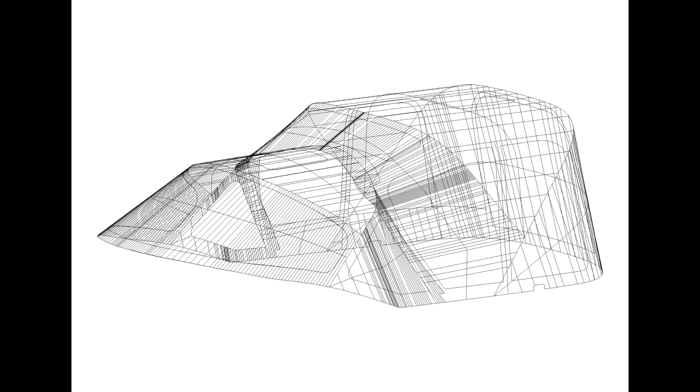The rendered shots - I've just posted one of the rendered shots of each project here, and then a photo of the completed project. It's not always possible to get exactly the same angle in the photographs as we've taken on the screenshot, just because of the elevation.

You're seeing here that there are no surprises really for the customer, and you can spend as much time rendering as you want producing the images. But what you're seeing now are some images we've taken a bit more time producing, which we've used for promotional work. These are all of projects that are actually completed, signed off, and went into production.

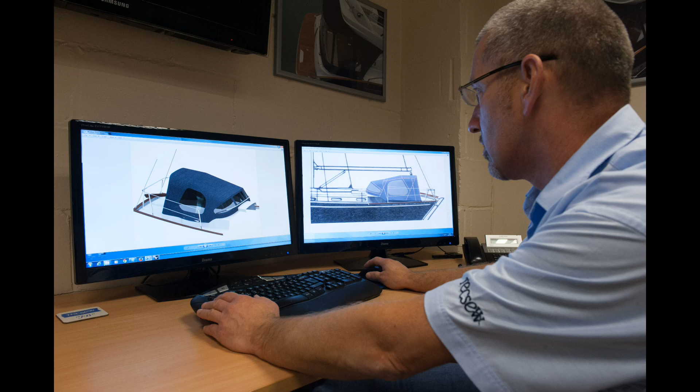Our CAD design process has been reviewed by a few magazines, including the project you're seeing now, which was done for one of the leading UK yachting magazines, Yachting Monthly. They actually awarded us the first 10 out of 10 they've ever given a reviewed project or product, so we were very happy with that.

They really were on board with the benefits of the CAD design process, and we were told that two other companies walked away from the project before we took it on, because of the difficulties in putting something pleasing to the eye on the boat.

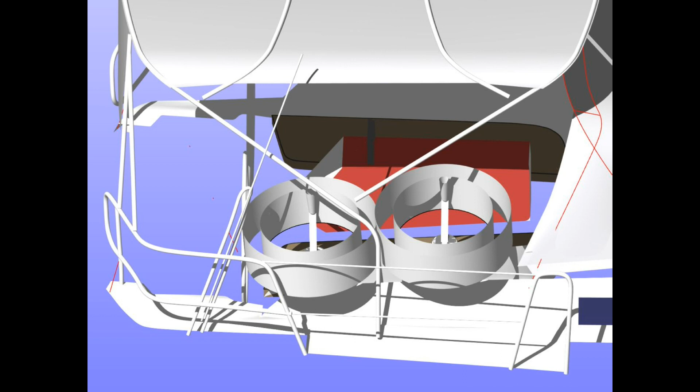You're seeing a shot here showing a Bimini. Bimini framework is sometimes difficult to work out, clearing the winches and such, but with CAD we can do that - we can check winches are cleared.

This is our CNC conveyorized cutting system. You would have seen a little of this in the preceding video. This is Paul, who works mainly on the frame bending side, but here he's operating the cutting table. So you saw the conveyor working there.

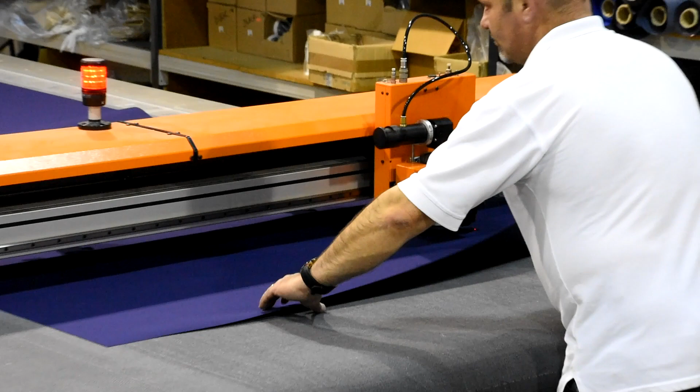What happens is the vacuum is released on the fabric, while the fabric's held down by clamps when the conveyor's moving. That drags the fabric to the correct position, and the vacuum is then applied. If the vacuum were constant all the time, the conveyor wouldn't be able to move.

So Paul's changing the pen here - different colored fabrics will require a different colored pen. We cut with this is Sunbrella Plus, with the fabric face side upwards, using Fisher Space pens which work on this fabric.

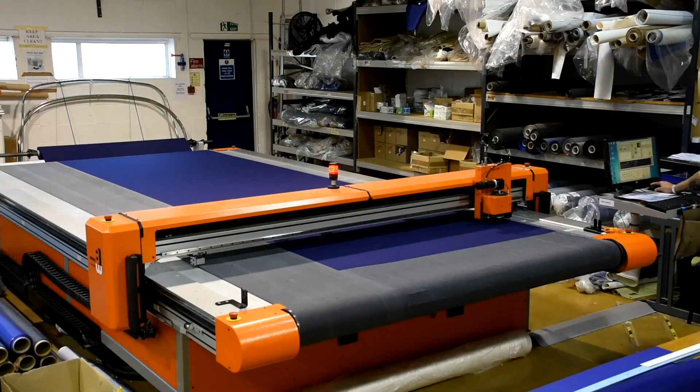You're seeing a CNC cutting file on the monitor there, and that's been sent over to the table, and the table's cutting. We can vary the speed - the table will actually cut quite quickly if we want it to, but generally there's no real need.

If it's cutting at full speed on a complicated project where all the panels are different profiles and shapes, there's no requirement for it to go super fast because of the operator time taking those panels off. However, if you're cutting many repeat products - perhaps halyard bags, identical winch covers - you can have it feeding into a bin as they come off the conveyor and not attend it.

The blade on here is vibratory - an oscillating blade. Before this we had a flatbed cutter of a different brand, and I'm guessing a few companies in the States have that sort of format.

What the vibrating blade does is require less vacuum on the fabric. There's less drag with the blade, and you get less of what we call hanging threads - basically where you don't get a clean cut, and some threads perhaps need going over with scissors just to make sure it's clear.

Because it's conveyorized, the fabric needs to be fed onto the table exactly in line with the datum. The fabric feeder uses a laser to line the fabric up with the table, so the roller will move from left to right and present the fabric exactly on the datum point of the table.

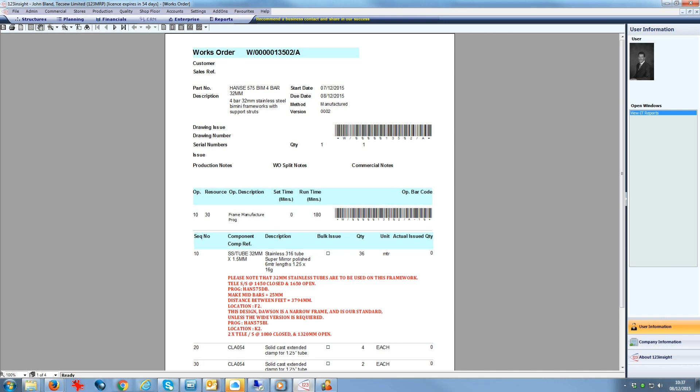This is an MRP system, standing for Manufacturing and Resource Planning, that we use within the company, and here is a work order generated for a framework to be produced. I'm now going to show a small video showing how we manufacture our frameworks.

Whilst the video is playing, I'll give a little bit of a rundown in terms of what's happening here. You'll see some text annotations on the slides, but I'll try and give an insight into what's happening.

Basically we do not bend a framework until the CAD design is signed off. That's what we're doing that is different perhaps to the competition. With all the new work, we're actually designing the CAD model, and it's only when this is signed off that we go ahead and produce the frameworks.

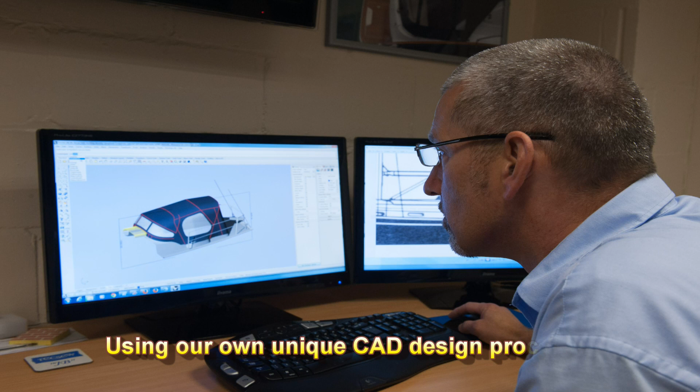Some of what you're seeing on the screen here, this project was the one featured in the magazine. We gave a comparison in terms of what was on the boat beforehand and how the new canvas would look and address many of the problems that they had on the boat. You can see on the right hand monitor there on the screenshot that we can superimpose the model onto a 2D drawing of the boat if that is available.

So the bar program is produced from that CAD model. We produce a DXF file and we bring it into a software package that we use in terms of generating a bending profile or a bending program to bend that shape, and we also store as a computer file a pattern of the bars. One, so they can be checked against it once they're bent, and two, the cut marks are on those drawings as well for the various cut points.

So maybe the front tube will be smaller than the rear tube.

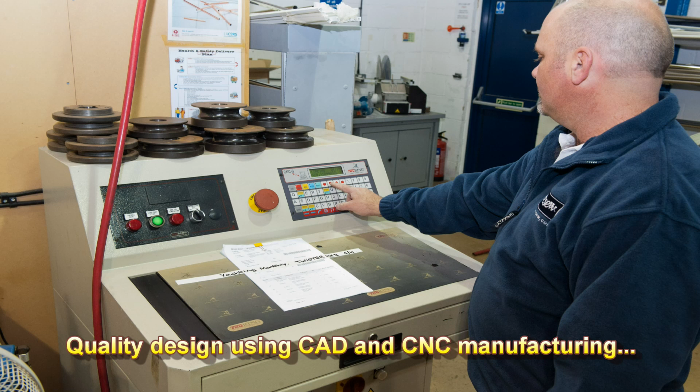The CNC program's fed through to this control system. It's not that complicated. There's a PC interface to do the programming, although it can be done manually on that keypad, but generally Paul is selecting the program on here, and once the program is selected, the bar will then be bent. There's a device there that operates off a foot pedal, but basically the tube is fed through the 3 rollers on this machine, and the top roller will move down and depress the tube, and that roller is controlled by the computer program, moving up and down all the time.

So a tighter radius will necessitate that roller depressing further into the tube. There are various size rollers that we can interchange on the machine for different size tubes, so different diameters will require different rollers. So most bars will be a combination of an identical radius in the shoulder corners, and then a different radius on the top.

But we are not restricted to any specific radius, apart from the tightest radius the machine will bend, which is around about 160 millimeters, say 6 inches, 6-7 inches, which is more than enough for our needs. So we can draw on the computer screen whatever shape we like, whatever radius we want in the corners. If we've got a 24-inch radius and we think that a 28 would look better, a 30 that would look better, we can draw it, and we can just keep changing.

And with the top profiles of the tube as well, we can match curvatures that we take from the coach roof or any other point.

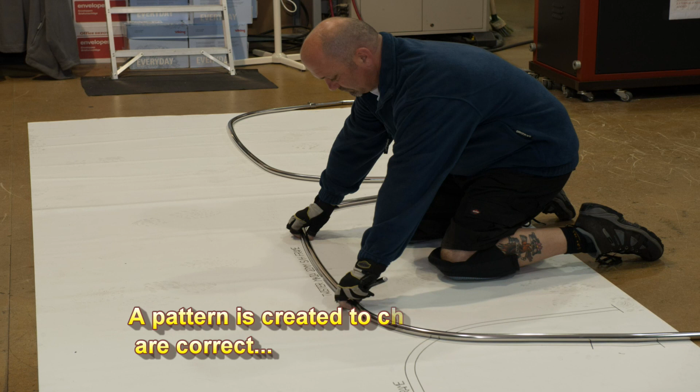This is our frame shop, so the factory that we have at the moment is split, well, a combination of two different industrial units. The framework is primarily done in this unit here.

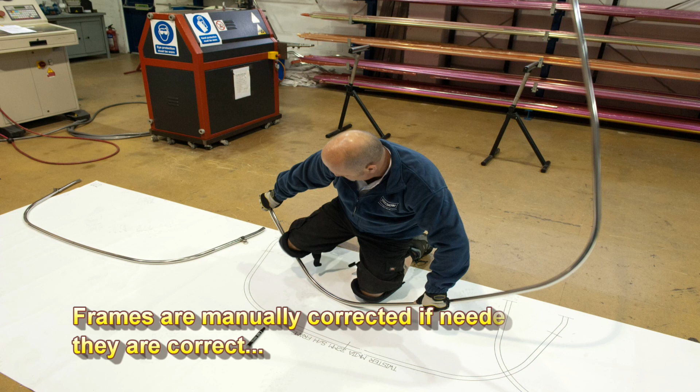So using the CNC cutting table, we would draw as a reference the correct profiles for these tubes, because we need to know where to cut the tube once it's come off the machine, and sometimes there can be a slight little bit of manual adjustment.

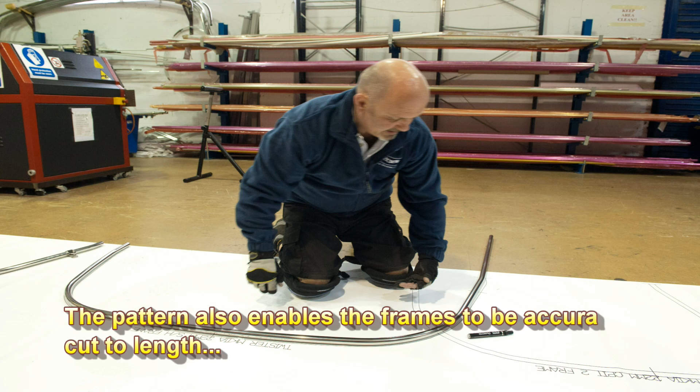What you become aware of once you start bending with machinery is that stainless is very reliant on its ambient temperature for consistent bending results. So when it's colder, it's much firmer, and it will tend to spring back a little bit once it's fed round a profile. When it's warmer, it will be much softer and easier to bend.

When the tube's cold first thing in the morning on a winter's day, we'll probably find that it's a little bit underbent and maybe need to be manually adjusted. This device, well, we imported this from the States. It's made by a company called Tri-Tool.

It basically uses a power drill and a lathe cutting tool, and it cuts the tube. One of the reasons we went over to this device was a manual cut-off saw created a lot of dirt, a lot of mess in the cutting shop. So this uses a lathe cutting tool, cuts the tube cleanly, quite quick and easy.

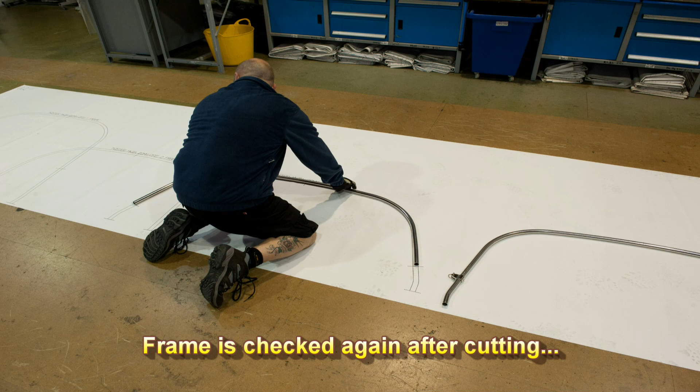The other option is obviously manual pipe cutters, but that's a quick and easy way of doing it.

We rivet all our fittings on with stainless rivets. We never rely on the grub screws that come with the fittings. Stainless is too hard for a grub screw to lock and locate unless a little divot is drilled into the tube to take the grub screw. But we will rivet, and always stainless rivets - anodized aren't strong enough for the job.

We use a pneumatic riveter, and the battery-powered version out on site. It's quick and easy, and it will store the ejected rivet post as well, giving a nice clean finish on the tube.

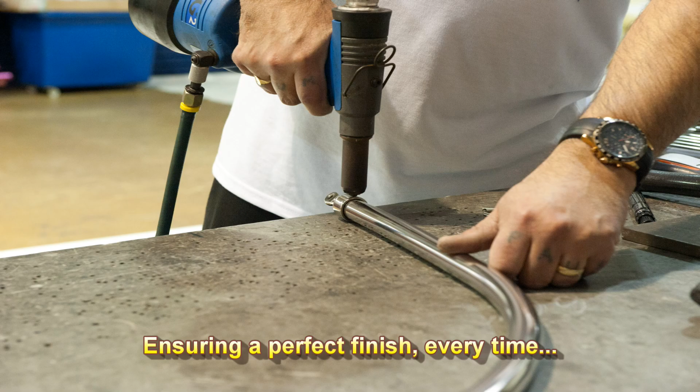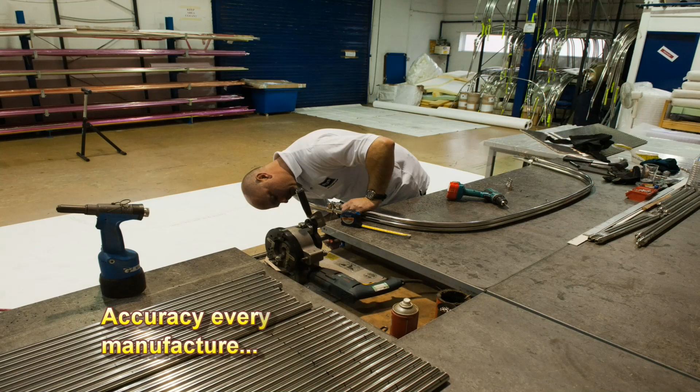So moving on, you can see the framework being put together. I'm sure we're all familiar with the fittings. We tend to not use screwed fittings unless there's no alternative, so all of our frames and deck fittings are quick release versions. Even if the fitting comes with a screw, we would probably drill out the thread and use a quick release toggle pin. The heavier size frameworks, 32mm, 1.25, we use drop nose pins to actually attach the framework.

Most of the screws that come with the fittings, we had warranty issues with because it's quite a coarse thread. There's no lock nut on the back, and quite often with a Bimini framework with a lot of movement, sometimes those screws come loose without the customer realizing.

We fit all our frameworks with these adjustable end plugs. You can wind each version in and out. On the right hand side you see the standard fitting that can be wound out about 25mm, and if you need to extend the frame more, you can use the intermediate or the longer pin. You just interchange it - screw one out, screw the other in.

These are great for recovers. So if we're doing a recover sprayhood, sometimes we change those fittings because the framework may not be exactly symmetrical. The customer may have cut a failed fitting off the tube at some point, and we do a lot of production work.

Certain boats may be slightly different as they come out of the mold. They just give a little bit of adjustment, and sometimes winding up the end plug by sort of 10-15mm can be all the difference between making sure the canvas work fits correctly.

And canvas stretches - later on it may shrink, but initially it tends to stretch. What we tend to find is after 3 or 4 months, if you go and wind these end plugs out 10-15mm, guess half an inch, three-quarters of an inch, you can get that as-new fit back into the canvas work.

In the rear of the shop, you can see we have a racking system for storing frameworks for production boats, but now so much of it is customized. Going back in the past, we'd probably run with up to 15-20 models of certain spray hoods on the shelf in the quieter months, ready for main season, which helped us deal with the ebbs and flows of the trade. But we still have production models, though we find we end up doing a lot more customization now.

This is a little easier to do with a CAD system, because once we've digitized the boat and built up the data we need, it's not that much more difficult to go on and design a higher spray hood or something that comes back a little bit further. So it gives us flexibility.

Right, we're going to move on in the video. I'm looking here now - you can see how we store the frames. We use a racking system basically without any boarding on it, and that works to keep them off the floor and stowed pretty well out the way.

We fit a lot of grab bars. With some contracts they're put on as standard. They're normally welded, although we've developed a way of putting side grab handles on now that's shown on our website with standard fittings. But this is how we would normally attach a welded grab bar.

So the pockets are all zipped, so that the canvas can be taken off fairly easily. And the grab bar obviously adds inherent strength into the framework as well. Again, this is a project that was featured in the magazine that gave us a 10 out of 10.

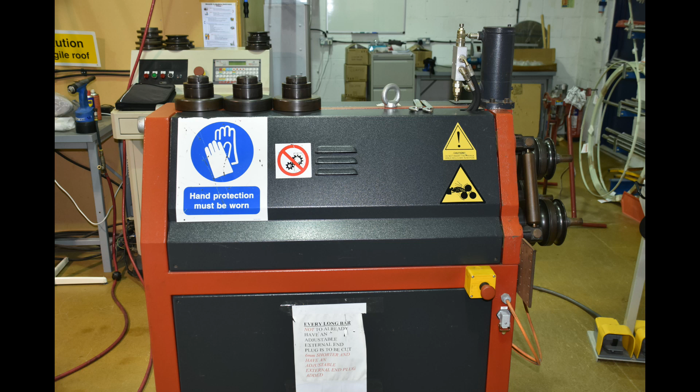This is the bending machine again in a little bit more detail. So this is a CNC control panel. The correct name for this machine is a CNC ring roller, and there are manual versions which are cheaper.

With the manual version, that center wheel would be wound down to the correct coordinates manually, and you'd keep a record of the coordinates used for different radiuses. But with a CNC version, the computer program will drive that wheel. So basically, if you draw it, you can bend it.

It's the center wheel that's moving up and down, and the two outer wheels that drive the tube through. This is a cutting device in a bit more detail, manufactured by Tri-Tool, an American company. It's a clean method of severing the tube.

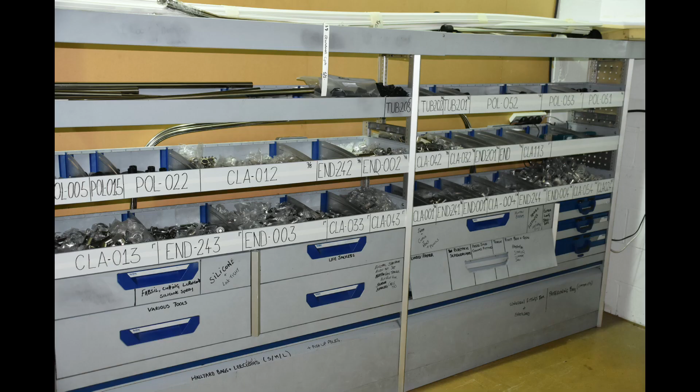I'm sure most of you are aware of pneumatic and battery powered riveters. We use a battery powered version of that out on site, and this is just showing how we store frame fittings. Part numbers are shown there, and this is a frame shop.

We also use this sometimes to lay out large templates, and we would use a ProLiner perhaps to register that template if it was something that was templated.

Showing part of our zip storage. We buy direct from YKK so that we can get the colors that we want. We stock zips in many colors, so there would be beige, burgundy, red, green, a mid blue, probably a few more as well, but by buying direct we get the colors that we want.

You're seeing some of the tools that we use for inserting and cutting the holes for lift the dot fasteners, turn buttons and eyelets. Grommets are put in on an automatic machine which has a feeder, and just some shots around the facility here.

Hopefully we're out of here in September and into our new building, which will give us more floor space and room to grow. I'm going to move on now onto a 3D CAD project which we've worked on recently, and I've taken some screen recordings of the project.

So let's see how we get on.

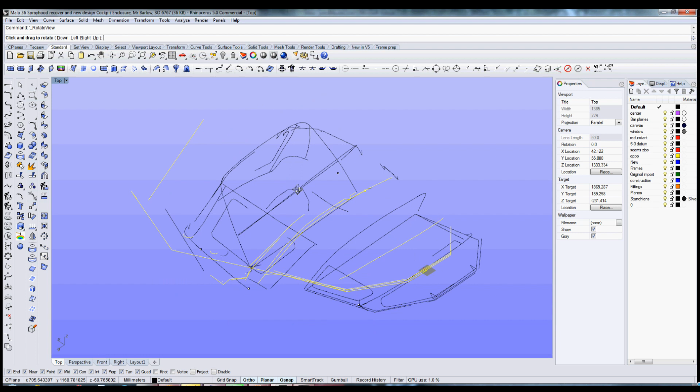We prefer working on projects where there's no pre-existing canvas and the whole design is down to us, but this project had a pre-existing spray hood and cockpit enclosure, and the owners were looking to improve the cockpit enclosure. Mainly they wanted more coverage with the roof section, so that the rear bar of the cockpit enclosure could come further aft, yet still have the framework work on a track and fold effectively against the arch. Now, you cannot capture all the data with a ProLiner in one location, so the ProLiner has to be moved.

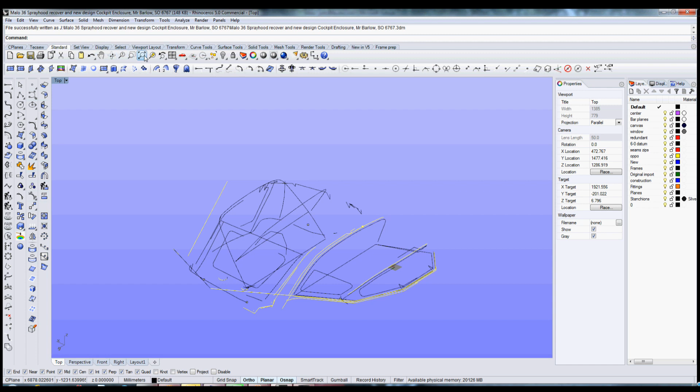Perhaps 2 or 3 times, maybe on a large project 8 or 9 times. But what we do is take reference points at each location of the ProLiner. So before it's moved, we capture 4 or 5 reference points, and then when the ProLiner is moved, we'll try and capture those reference points again, and like a jigsaw puzzle, we'll use those reference points to snap the data together.

So the black here is the first file with the ProLiner in one location. The yellow is once the ProLiner has been moved, and what we're primarily doing here is getting points that are on the arch that couldn't be obtained with the ProLiner in the first position.

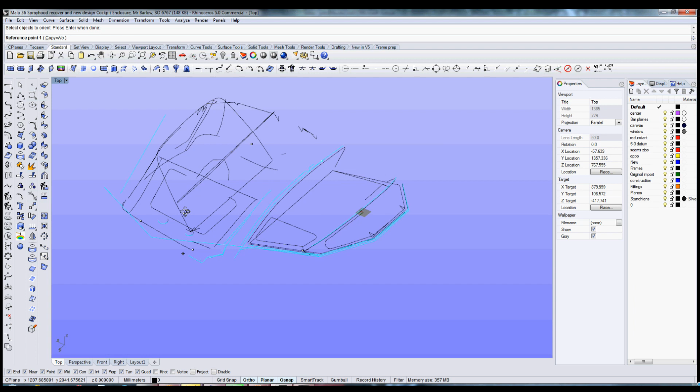You can see the bar profile of the spray hood there. The yellow doesn't correspond with the black. The black is registered with a ProLiner inside the canvas, so it's the inside of the bar. The yellow is with the ProLiner moved to on the foredeck outside of the canvas, so we've got the outside of the bar.

So we spend quite a bit of time trying to fine tune and get the best match lineup that we can, because there is a tolerance on the ProLiner, and points can be out by 1 or 2 mil. You can also find that if it's windy, that will affect the accuracy as well, because it can put a little bit of a bow in the wire to the probe.

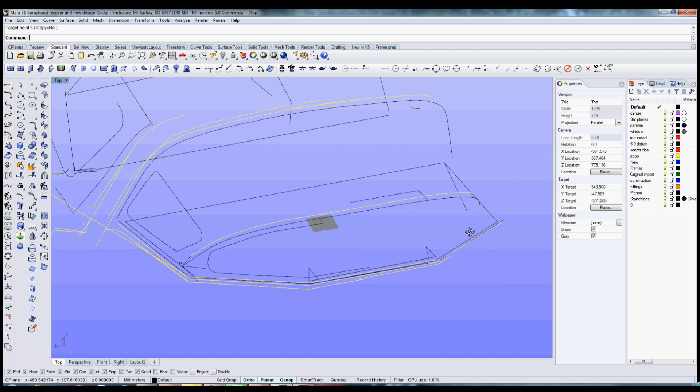So we would always take more than 3 reference points. We don't use the datum points that come with the ProLiner, because that's a set of 3 points. We would try and take at least 4 or 5, because you can guarantee once you've moved the ProLiner, one of those 3 points you cannot reach. So if you've got 4 or 5, you have a good chance of getting the 3 that you need to match one part on top of the other.

So here you are, we're just taking time, getting the best match that we can. Within Rhino, sometimes the lines can look quite far out, but when you actually go in and measure the discrepancies, it tends to make it look worse than it possibly is. So what can look like quite a large discrepancy, if you go in and measure it, is probably 1/8 of an inch, or 2 or 3 mil at most.

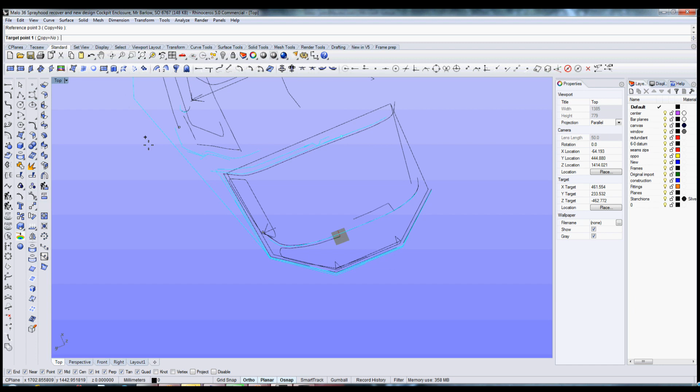So here you go, I've got a custom desktop as well. If you're using Rhino, which is our CAD package of choice, you can customize your desktop. You can bring the tools onto your desktop that you use frequently, and once you get to learn your processes of actually

lining up the drawing and producing what you want, you'll know which tools you need. Rhino is quite a cheap package compared to SolidWorks. The reason we ended up using Rhino is when we first started using CAD, we looked at SolidWorks, and at that time SolidWorks wouldn't perform some of the functions that we needed. One that comes to mind is lofting to a point. So if you imagine a push-up pole on a flybridge tonneau cover, you couldn't produce those surfaces.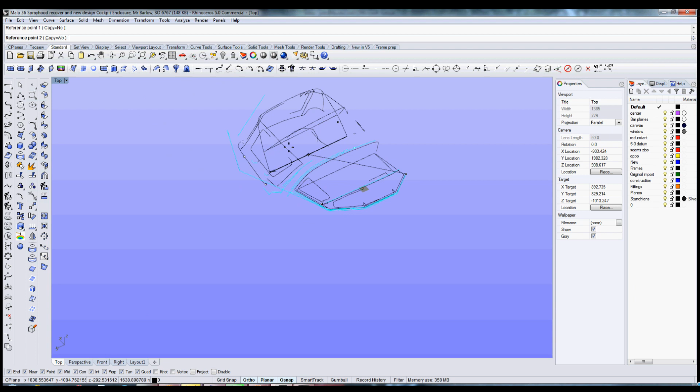Those points have been addressed in SolidWorks now, but by the time they came back to us, we'd been using Rhino successfully for a couple of years, and to me, Rhino is the package of choice. It's easy to learn, it's cost effective, very easy to customize as well, and we wouldn't look at another package. To me, it does everything that we want.

We don't use mPanel or any of the other plugins. We have a few scripts that we've written ourselves. And there's lots of add-ins that you can purchase, some of them free for Rhino, that will give you added functionality.

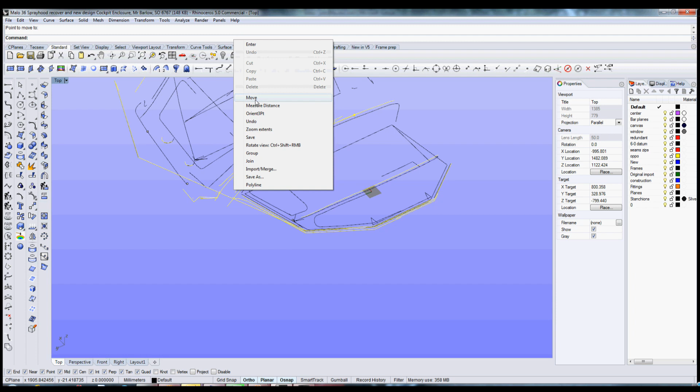So the main thing with Rhino is learning the relevant tools to get what you need out of the package. There are so many tools within the package that quite often, if I give advice to anybody that's trying to do something within the package, the tool is there. They're not aware of it. They're not aware of what can be done. And I have to wonder, even with ourselves, there's probably better ways of doing some of the bits and pieces that we do.

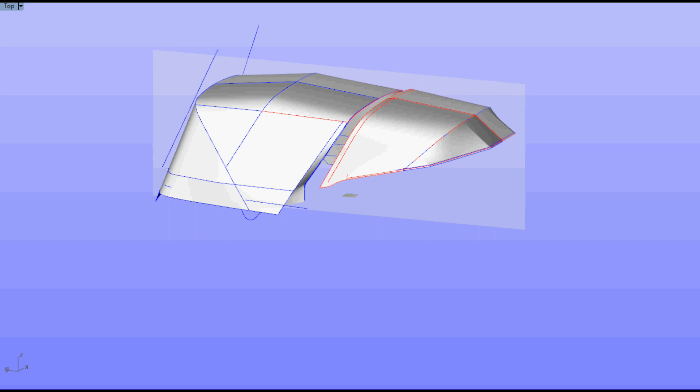But like I say, I would recommend Rhino, and the ProLiner is the device that we use. One thing with the ProLiner, I've been contacted by many companies asking for advice on how we do what we do, and there's a big learning curve, and to get on and do what we're doing with Rhino and CAD takes years and years of experience.

But there's an easier way in. I would perhaps start using CAD where you could justify the cost of a ProLiner for basically copying in 2D canvas patterns. So if you've got access to a CAD cutting system, you could register those patterns that you have stored away. They're much easier to find if they're on a computer, with a searchable database.

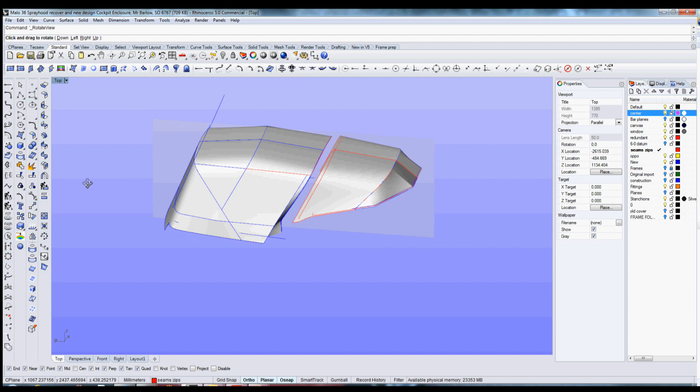So perhaps start with learning 2D skills. We started designing frameworks. There's nothing worse than having to cut frameworks and tweak frameworks on a boat. With CAD, if we want a framework to end up at a specific height in a specific location, you can draw that in CAD and work out the measurements that you want. And you can design the framework to work around winches and things.

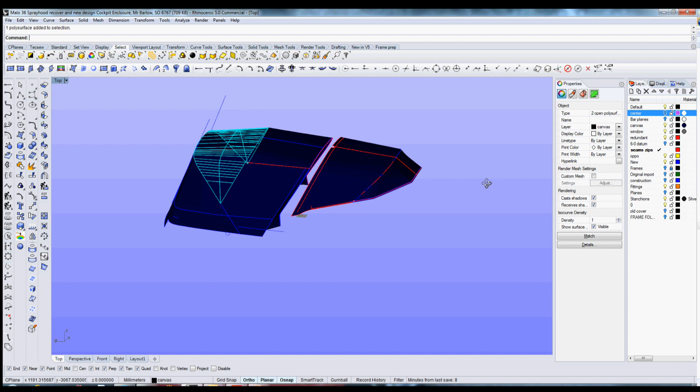So I wouldn't look to go into the full functionality of designing 3D canvas at first. I'd look to store patterns, basic products like dodgers, sail covers, design of frameworks, and then move on up as your skills build. What you're seeing here, you've probably seen this running in the background.

The package is... you can see the spray hood is basically very similar to what was there before. We haven't really changed anything, but we'll try to improve the fit and get a better window line. But with the cockpit enclosure, we've brought the back edge much more towards the vertical now, so we're giving the client more coverage, more volume in the cockpit enclosure, which means he can get behind the wheel and pedestal easier.

And if the back's rolled up and he's standing underneath it using it as a bimini, the roof is further extended over his head. And the backstays are registered there because the backstays are the limiter in terms of how far back we can bring the canvas.

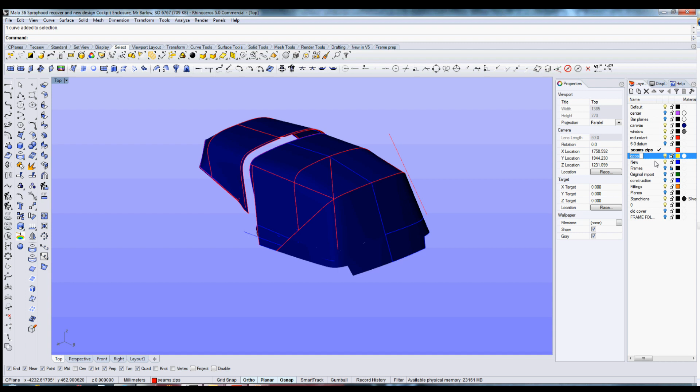This particular boat, the port and starboard are different. The winches are different - we see this on a lot of models because winches don't always operate the same way around. Sometimes the winches on the port side will be in a different location to the starboard side, and the winches deflect into the canvas here. Also the arch isn't symmetrical, so it almost means designing the canvas work twice - that's the same as if you're templating or measuring, because if it is different, then you're doing both sides.

But generally most boats would be symmetrical, and we're aware of the things to look out for. Arches tend not to be symmetrical. Winches can quite often be different on both sides.

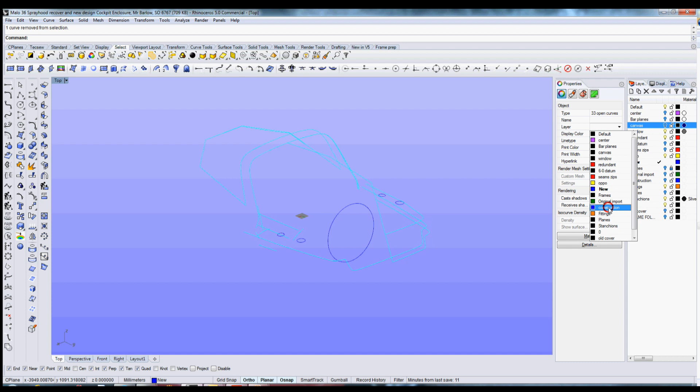So you can put your various elements on different layers. You can turn layers on and off, which helps if you're working on particular aspects. I definitely recommend getting used to using layers within Rhino, and you can change the color attributes of different layers - so if you select yellow for that layer, anything you put on that layer will be yellow, and you can change parts you've already drawn from one layer to another.

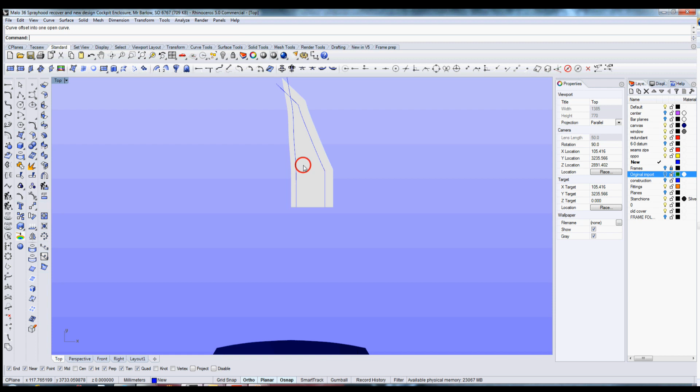What you're seeing here, I'm just selecting bits and pieces and working on the profiles. You can unroll the panels once you've drawn the model, and it's easier to draw windows with a panel on the flat, so unrolled. One of the reasons for doing that is you can put radiuses, fillet curves, offsets - all tend to work easier with the panel unrolled.

Once you've drawn what you want, you can roll that geometry back up onto the panel, and you'll see that in a minute. So I'm going to put a radius in the corner there, and I've selected that radius to be tangent to the two lines I've drawn.

The old window line is on there as well, just as a reference, so I've turned that on and off, you can see there. But as I say, we're not changing too much on this, but with CAD, things like offsets are very quick and easy - it's a click of a button, and there you are.

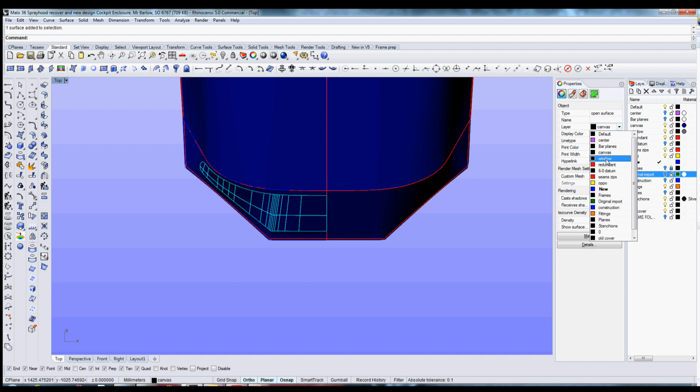I've just rolled that back up onto the panel. So the curve that I've drawn, which is a window line, I've rolled back up onto the surface, and then I've split the surface with that line, and the part that's a window has been split from the canvas, so I can give that a different attribute.

All I've done is put that on a layer that I have marked as window, and the characteristics of the window layer are that it's transparent with a little bit of reflectivity, and the color matches window material. We create a template for this within Rhino, so when I open up a project, those layers are already there - we have a canvas layer, a seam layer, a frames layer, and a window layer.

As you'll see here, when I split this panel, all I need to do is move it onto the window layer, and once I've put it onto the window layer, it will automatically have the attributes of window material.

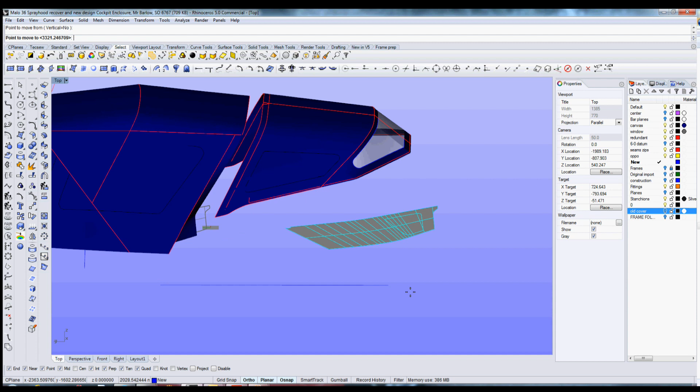Sometimes things don't work, but with experience you tend to find out why. So if you can't split a panel by a line you've drawn, what you probably need to do is just pull that line back onto the surface, and then it will split.

What you're seeing here is the window on the old canvas that's there already - I'm using that as a reference. I would have taken some notes if I wanted to change it, and we take lots of photographs when we're on the boat as well. If you're using the ProLiner, you cannot take enough photographs, and it helps to work with twin monitors so you can look at a photograph of the boat whilst doing the design work.

So I'd be aware and take notes of anything I wanted to change, but the client was quite happy with what was on here beforehand. So I'm filleting the corners of the window here.

You'll see what I'm drawing is a little bit different to what was there before, mainly because there was a slight mismatch in terms of the bottom profile of that side window compared to the spray hood window.

I can go in and take measurements, and I can adjust afterwards if I think it perhaps doesn't look quite right. It's quite quick and easy to adjust.

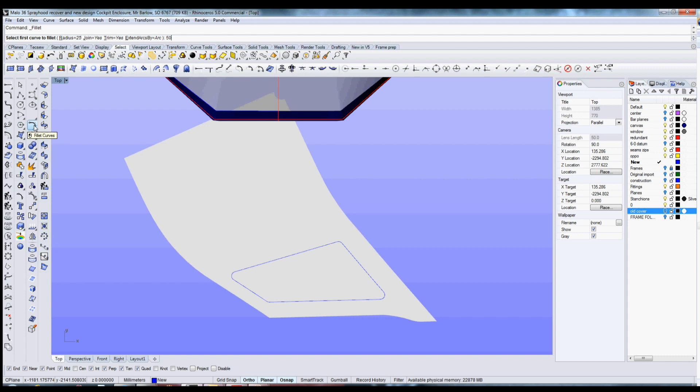So what I'm doing here is I'm actually going to raise it up a touch more, and fillet those corners there. You'll tend to have your standard radiuses that you'll use for a lot of projects. As you can see, this doesn't take long, and it's quick and easy to adjust - if you were marking this out on canvas with chalk or pencil, it takes, I would say, more time.

So now what I'm doing is I've rolled that profile that I've drawn back up onto the actual canvas, and what I'll be doing here is splitting that canvas by the line I've drawn. I select the line, split the canvas, put that split section onto the window layer, and it automatically generates the appearance of a window. And now I've deleted the old window line.

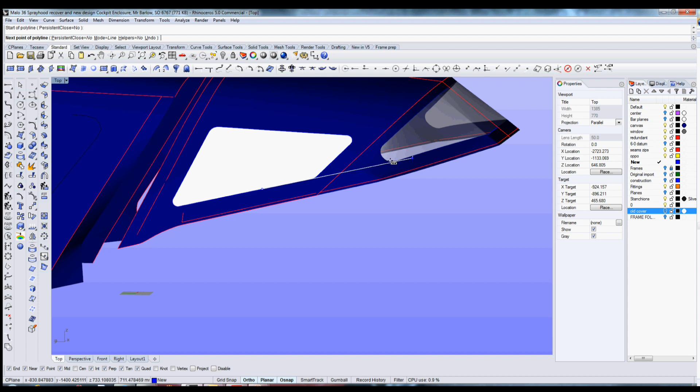As you can see, I'm just looking there - the side window runs into the profile of the front window in terms of the offset up from the bottom. It looks correct. It will be a different measurement up to what the front window is, but optically it looks correct. Now normally, most boats being symmetrical, you would just mirror this and it will work on the other side. But the other side of the boat is different.

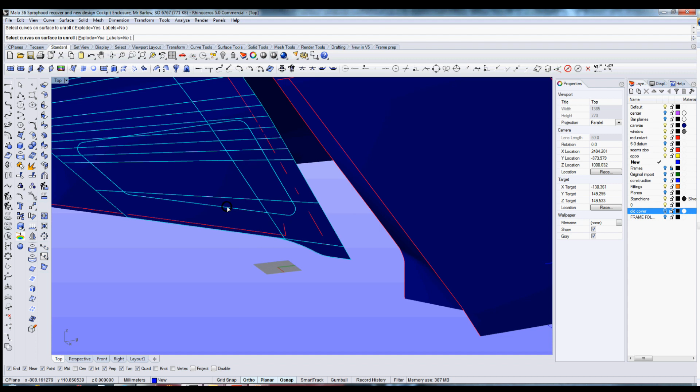So what I've done, I've mirrored that line, which wouldn't have been on the surface. Now I've used a command called pull to pull that onto the surface - basically it's just projecting it onto the surface. Now I flatten that surface with that line. But what I'm going to do is I'm going to draw that now properly.

Although I've just pulled that onto that surface, the offsets may be different to the other side. So say the window was 4 inches up on this edge, it may not be, and you'll see that as I start to draw. So I'm taking some measurements just to have a look, and so there you can see straight away where it's different port to starboard, and that's because the arch is different. So I'm typing in the same offset measurements that I used on the other side.

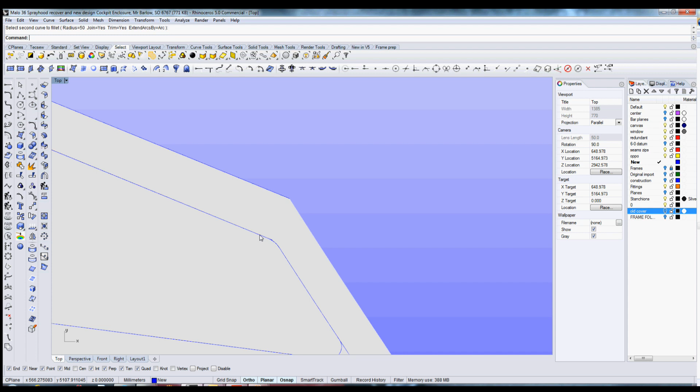It's always a difficult one when a boat is different port and starboard. I always make the owner aware. I think we've all had from time to time where an owner will actually take out a tape measure and say, well, this is a little bit different port to starboard. So what we do is we try and get something that looks right, where the eye wouldn't naturally pick up that it's different. But obviously if somebody was taking a tape measure, they could measure the fact that this window is not the same length on the top edge port to starboard.

But the owner will be sent what we call CAD renders, photographs of the actual completed model, and we take photographs from all angles, and you'll be seeing some of those later. And we have the owner sign the project off. So I would make them aware that it's different port and starboard, and they would sign this off and say yes, that's okay, or no, can we just change that a touch. So you're seeing the difference there between port and starboard, and that's because the arch isn't symmetrical, which will obviously affect the back cover as well.

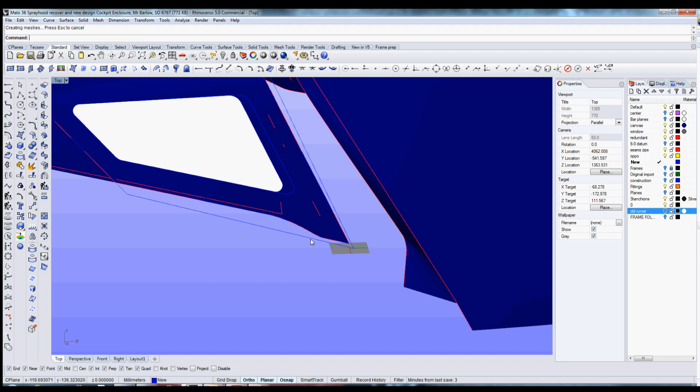So now I'm splitting the surface by that line, putting that section that's been split onto the window layer. Now it's got the appearance of the window, and I can delete the lines that I don't require. And so very quickly, this is starting to look now a lot like a completed spray hood on the boat. I prefer to be designing the framework as well, and that way we have complete control over what we're doing. We've redesigned a few of these before, where the client has paid for a new framework, and we've quite often put a second bar into the spray hood, just to give a little bit better support to the roof.

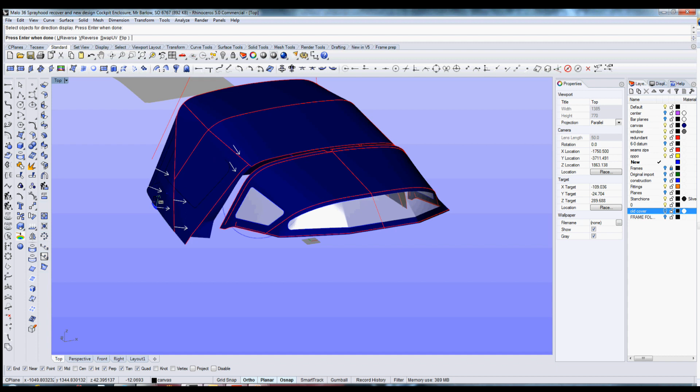So some of this is going to be relevant to people who are already struggling to use Rhino. When you create a surface, it has a top face. Now you're seeing these arrows pointing in on one side and out on the other side. Basically, you need to be careful. So you can go into Rhino and you can change the direction. So that one's facing inwards, and I've just changed it so the top face is the outward face.

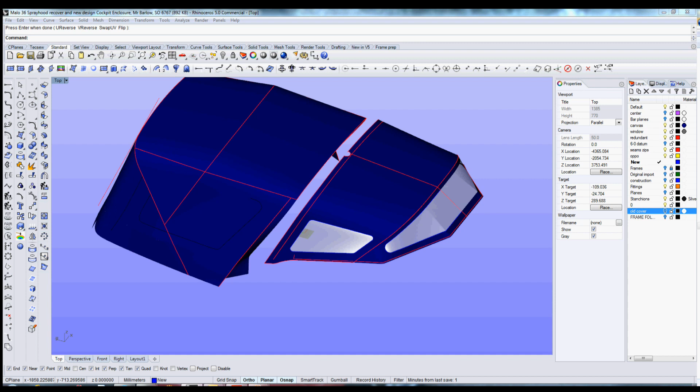Now where that causes a problem is that if you unroll the port panel on the port side, and the CAD has got the inside surface as the top surface, then when you unroll it, it will be the opposite of the port side, if that makes sense. So basically, if you had a plastic template, it's like your template being the wrong way round. So you're cutting out your Sunbrella Plus panel with your plastic template upside down, and you're going to create the opposite panel.

So I've just gone into here and made sure that every panel has the outward surface as a top surface, so that it's going to work correctly.

So I'm just working on the model here. We need to be putting the windows into the rear cover. The rear cover is very different now to what it was beforehand, but I have still got some points in there as references. What I've done is I've averaged the zip position on the old cover between port and starboard. Because on the boat there's a fastening either side of the zip, and to use the existing fastenings, I need the zip to run down to the same location, so that there's a fastening just inside where the zip is.

And because the canvas distorts, that's not a straight line, as you can see, but what I've done is I've created a straight line from the old line, and I've turned the canvas layer off there quickly, so that just makes the canvas disappear.

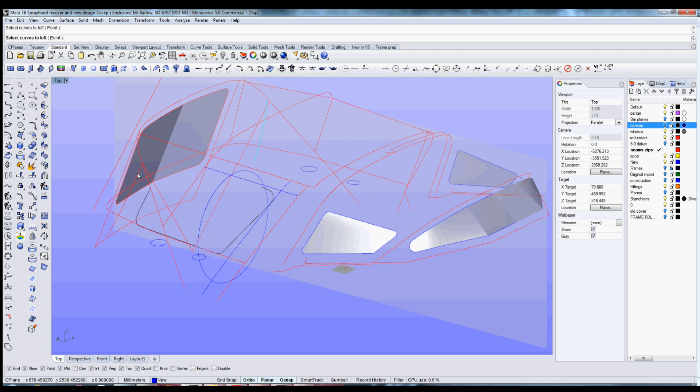So just working a little bit more here in terms of myself being happy with what I've got. I've drawn what's called a plane between those two lines, which is basically a surface between those two lines, and what I'm going to do is project that surface. You'll see this in a minute, it'll make sense.

So that was created as what we call a poly surface. I've projected that. Now what I can do is create a line where that intersects the canvas, and that will give me my zip line. So I shall be getting rid of that layer in a second. In fact, what I've done is I've put it onto a layer that I call planes, and then I've turned that layer off. So I have my zip line there now.

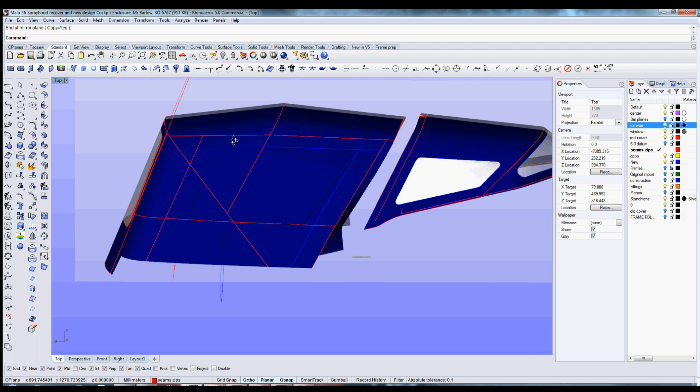Now that line you saw there is where a flat face, a plane, intersects the canvas. But what you'll find is if you were to lay those panels out, it's not actually a straight line. It will curve a little bit at the top, but aesthetically we find that sort of looks better.

Now I'm not happy with how that worked, so what I'm doing - quite often we create a plane that matches the rake of the back panel, the angle of the back panel, and I'm going to use that to give me my zip line, which is going to be slightly different from what I've just drawn. But it's still coming down to the same position at the bottom, so it'll still catch the same fastening on the boat.

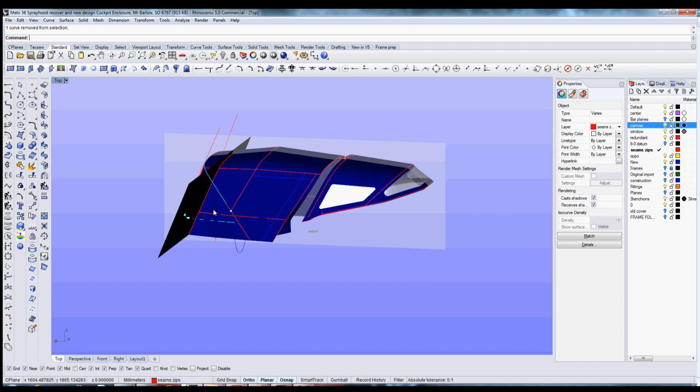So one of the things you can do with the CAD is you can reference angles that are already there, and you're seeing some of the planes that I've got here on that layer that I had turned off, which I've used for creating the back angle of the window and other little bits and pieces. So what I've done with that zip line now, if you were to look exactly side on, the zip is running up at exactly the same angle as the rake on the back door, which to me quite often looks best, and that's easy to do on the canvas, on the CAD.

So you can see in the black there's a couple little reference marks from the window of the old cover, but that's all going to change because we've brought the canvas further back.

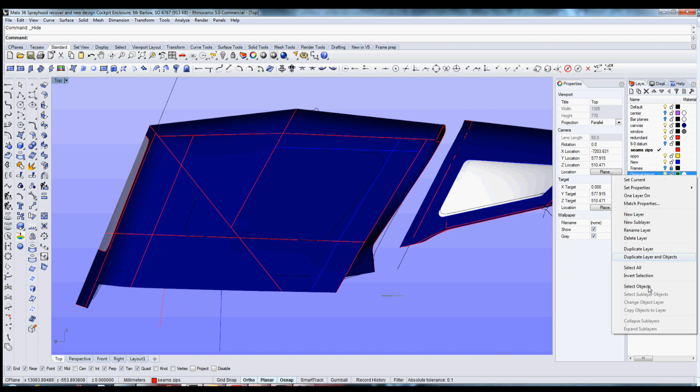The framework, like I say, has to fold against the arch still. So within the CAD, there was a track on the boat. We're going to replace the track. The slide track is going to be longer, but I've worked all that out in the CAD.

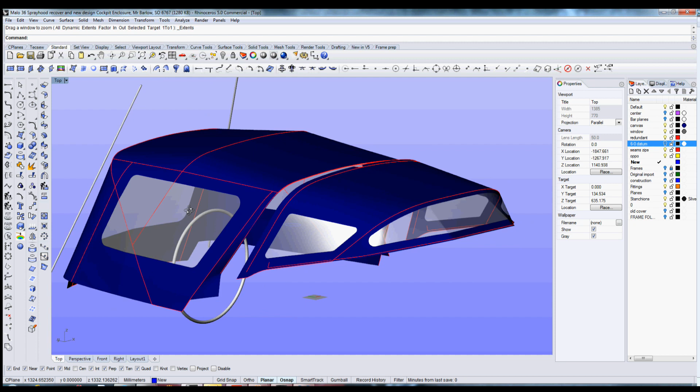The owner on this was quite specific, so you can see it's quite peaked on that center bar of the cockpit enclosure. He specifically wanted that height at that point. Now, left to my own devices, I would have liked to have created a better line across the top of this, but practicality comes in as well, and that height there gives the owner standing height at that point. So that's why it's peaked up in that position.

And the owner's since signed this project off. So, but he would have had a chance to say, no, let's lower that bar a little bit, let's reduce the height on that center point. But he's got what he specifically wanted on here, and that may not always be what you would perhaps design, but you advise the client, but the client is always going to be right at the end of the day.

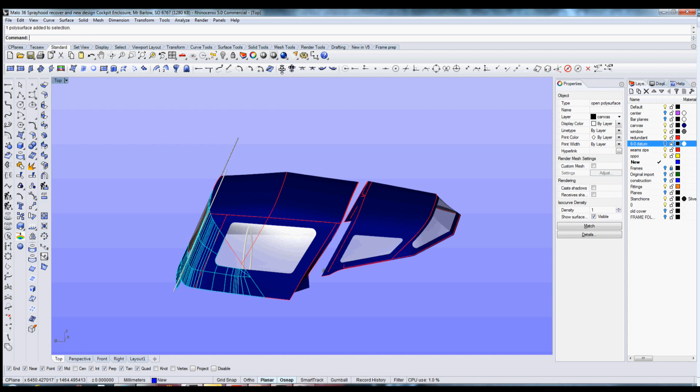So you can advise the client, but at least they're seeing how this looks, and you don't get to the situation where you have a completed project and the owner comes back to you and says, well, that doesn't quite look right, and you turn around and say, well, we've done what you've asked for. But the owner may turn around and say, well, you should have explained, or you should have insisted that perhaps I did something a little bit differently.

Now, this is creating a CAD render. Basically, it's a photograph, a snapshot of the actual project, and we send these to the client via email. We save these with the project so we have them for future reference.

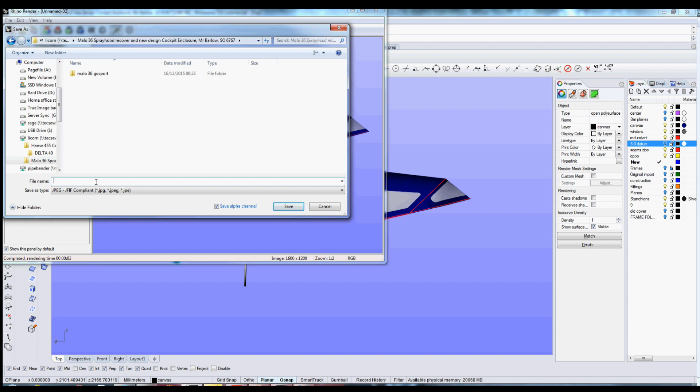We can load them up to our website, and in fact, we resell a lot of products that we create. The website works wonders for that because we photograph in detail and put quite a few photographs on the site, but we normally take a lot more to enable somebody to self-fit that project. Because we'll have a CAD file for cutting the canvas and a CAD file for bending the frameworks, it's fairly easy to replicate, even if somebody came back nine years later and said, I like that on your website, can you reproduce it?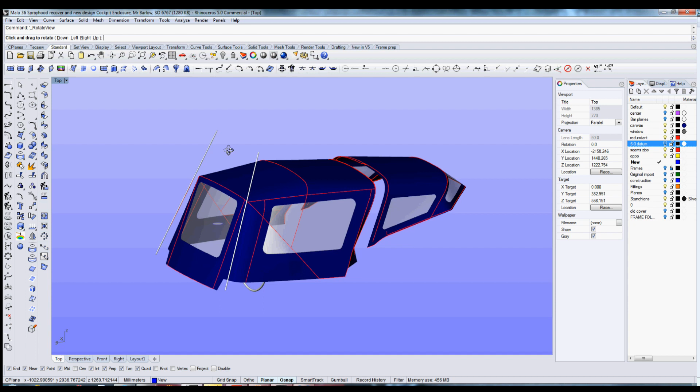What we find with the CAD shots as well is sometimes they show the client in more detail. Photographs, sometimes there's a lot of junk around the boat that stops the prospective client from seeing exactly how the project works, how a framework might clear a winch. So we tend to take the CAD shots and put them on our website as well as the finished project.

So I can spin this round to any angle if I'm trying to show the client anything in particular, and then I can take a photograph, or as I say, a CAD render. You can change the settings, the background color of the render. I could go in now and change the color of the canvas just by going into that layer and changing the attributes.

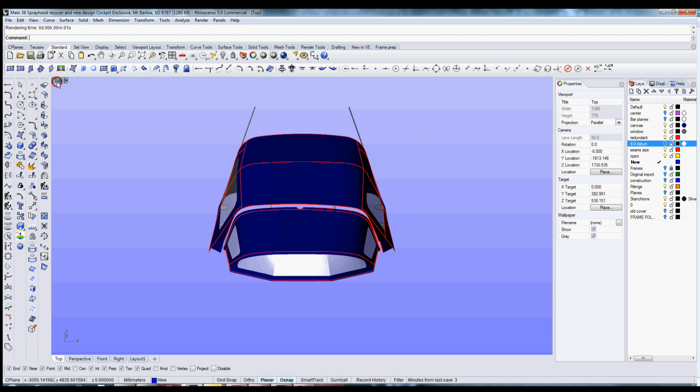If I wanted to spend more time and get a much classier effect with the renders, you can actually superimpose or tile the canvas texture. So we've got photographs of all the Sunbrella Plus colors at high resolution, and you may have seen this on our website with certain projects. If we want to, you can tile or overlay that texture, so the exact color you're laying over the model gives you the correct color with the actual weave of the fabric.

If you were to go in close, obviously from a distance you don't see the weave of the fabric, but it can give a much higher, or better, look to the renders. And the same with window material, GRP. Rather than just classifying GRP as white, you can give it the reflectivity and the gloss that gel coat would have.

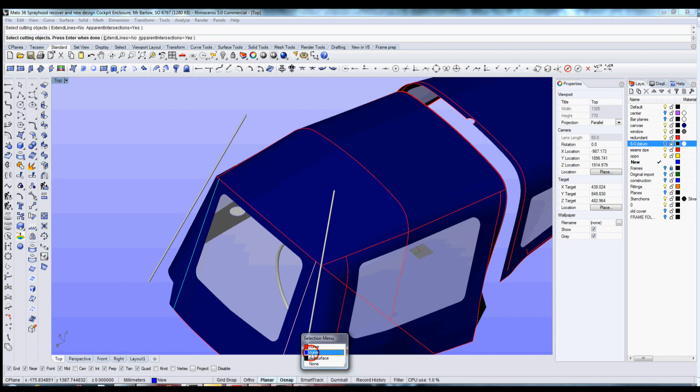Rhino actually comes with a materials library, and there's a marine materials library in there—stainless, Perspex, GRP, lots of the components you'd find on a boat. That material is actually there, so you can assign it to a layer. And then if this was a motorboat with a glass screen, we can get very high class renders of that. We use a plugin for Rhino called Flamingo.

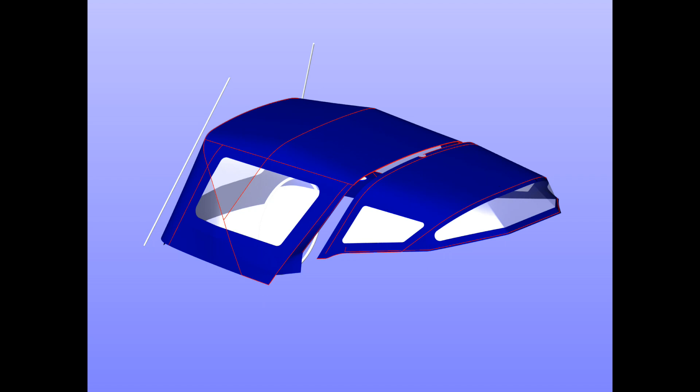Rhino has various plugins for various extra functionality. What Flamingo will do is create much classier renders—more accurate, and you can get the reflection off GRP, refraction off the window material. It takes more time, so we only do that for prestigious projects, or if we want shots for a brochure, but there is the possibility of doing that.

You've seen some images on screen, which are the actual CAD renders, the snapshots sent to the client. We can show how the back door rolls up, the side door rolls up—this customer's having roll-up panels as opposed to zip removable. Here you're seeing the yellow line indicating the old profile of the framework, and the canvas line against the blue, which is the new line. It's a handy tool for showing the customer, much easier than trying to set the framework up on the boat with the client there, holding it up and cutting bits and pieces off—this is just much quicker and easier.

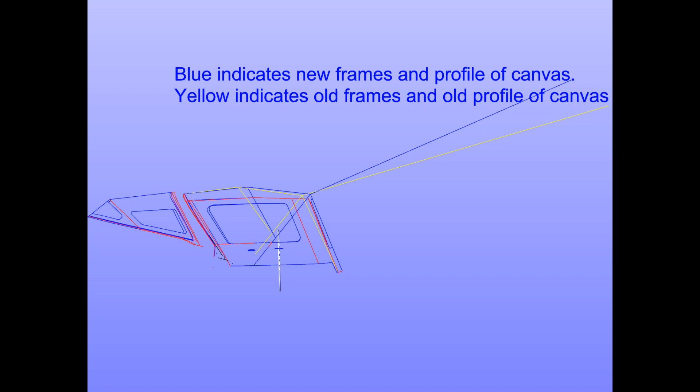We're now seeing on screen CAD renders taken with Flamingo, the plugin for Rhino, which produces a much higher quality render. We're seeing GRP looking correct, stainless steel with the correct reflection. You'll see a Perspex windscreen in a second, and these are all generated with materials available within Rhino, so you can assign a layer a material that's available within Rhino.

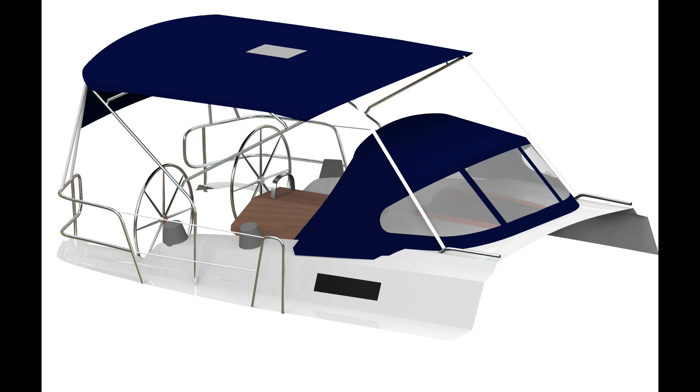That might be stainless steel, and then anything you put on that layer will look like stainless steel. Equally with GRP, you can create a layer called GRP Deck Surfaces and assign it the Rhino GRP material.

These are available in the Marine Materials folder, so there's various wood finishes, Perspex, window materials, and if you assign that to a layer, or equally just individually to a surface, it will render correctly and much more accurately within Flamingo. Great for promotional shots, or where you just want to spend a bit more time generating a better render for the client.

One thing worth mentioning, which you're going to see in the following shot, is that Rhino can produce shadows, and you're seeing the shadows on this image from the stanchions. You can turn shadows off in Rhino, and you can turn off the reflection on a material as well. So either turn off shadows or turn off the ability of a material to show a shadow. Worth turning that off.

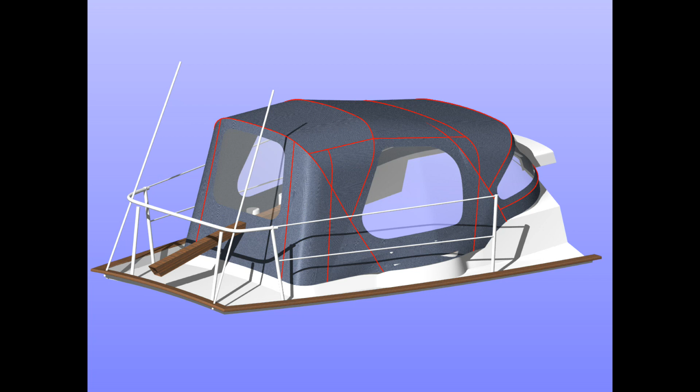It's worth noting that these projects you're seeing now are not generated with files supplied by the boat manufacturer. These are all drawn up with information taken with a ProLiner.

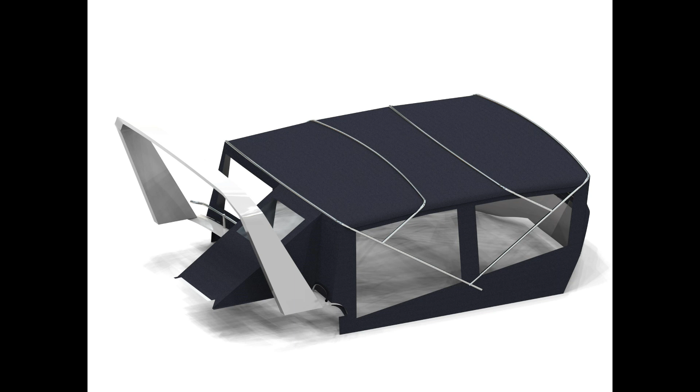The framework superimposing through the roof canvas there, we just do that to show the client the line of the framework. Obviously it sits inside the canvas within a pocket, but when we used to do that, the client often asked where the profile of the frame was. It's an easy way of indicating that.

So we would normally draw up the services or the relevant surfaces just to give us the ability to decide where we're going to mount the framework and design a project from scratch before taking a framework down to the boat.

I'm now showing a couple of projects that were designed for a boat manufacturer that we supplied. So we're working with 3D CAD files supplied by the boat manufacturer here. Now we will use a ProLiner to verify that certain items are correct.

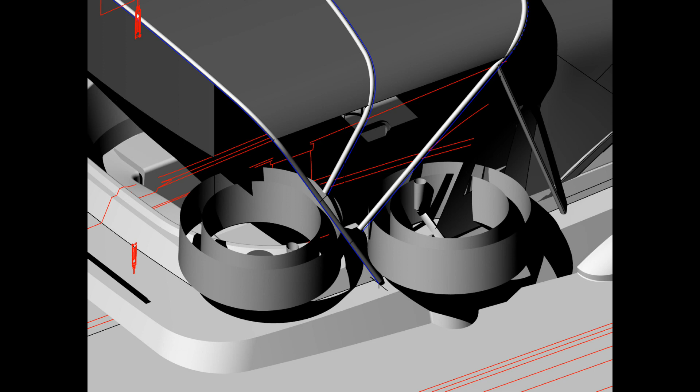The windscreen manufactured on this boat may differ slightly, and sometimes winches and deck fittings will be slightly different to what's on the CAD file. But with modern production techniques, the GRP surfaces will be correct. We've digitized around various new boats where we've had the CAD files, and they don't vary - it's within millimeters. But you can see here we can reference heights.

We can show how the main sheet will work in terms of clearing the framework with a Bimini. That one was on a slide track. It's a great tool to agree a design with a boat manufacturer.

Lastly, what I'm showing here is that Rhino can also be used for upholstery. So again, great tool for working out the design, getting the profiles right, and showing the customer how this will work with fluted vinyl and without fluted vinyl.

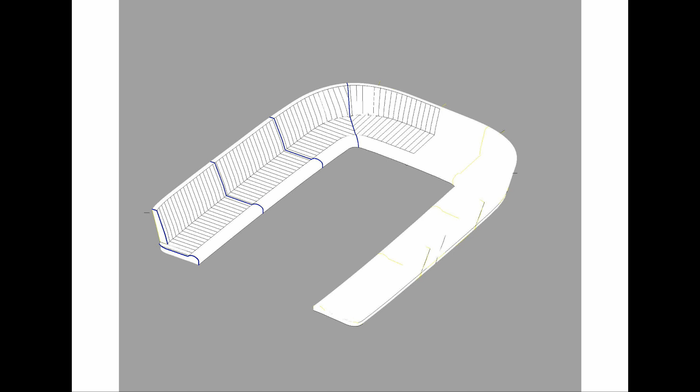What should be remembered is that we're not just drawing pretty images here. The CAD model here will actually be used to generate the cutting program. We can take all of those surfaces, flatten them out in the CAD, and nest them so they're cut correctly within the material to save as much material as possible.

Well, I hope you've enjoyed the presentation I've put forward. Obviously, I've only touched the beginnings of CAD design, and it probably opens up many questions. I'm sure you all have many questions in terms of how you would implement CAD into your business, where you would see the gains.

I guess the most complicated part of all of this is it's no good generating a CAD model unless you have the means to then go and produce the canvas work. So if you have a CAD file, you need a way of actually cutting those panels out - you need access to a CNC cutting table.

But what I would suggest is over here in the UK, there are a number of suppliers into the marine industry now that have themselves installed a CAD cutting system, and they're offering this CAD cutting service to smaller companies. So it may be that if you can't justify the cost of a CNC cutting table, research whether maybe there's a larger company that would offer this service to you.